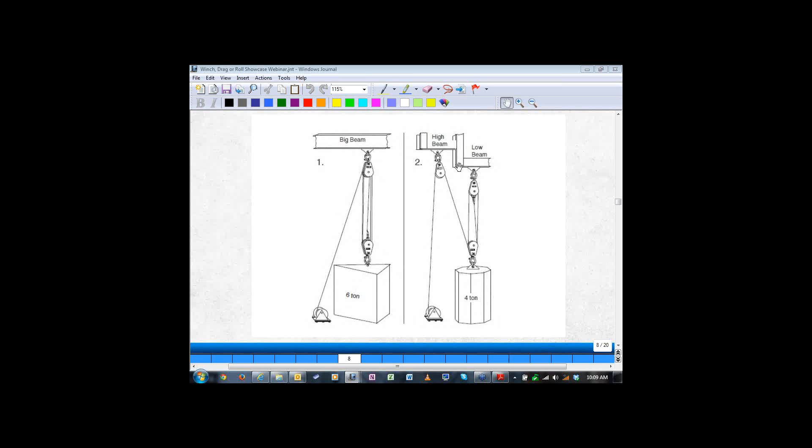Let's open up - I hope a lot of you downloaded the link that was provided by Jonah for the workshops we had. We had about a 6 or 7 page PDF document that came out to everybody when you registered, and you got notification of it yesterday. You also had some rigging cards - I'll put those up on the screen. We're going to be working from a multi-panel rigging card, I'll pop that up. We also have a journeyman card, and a master rigger card that we provided with the link.

So the PDF link document that we put up, this is the first one - it's really about winches, keynoted as Winch, Drag or Roll, and some of the workshops we'll go through today deal with those subjects. In this first example, we're just going to look at the one on the left for a minute, on page 3 of your document. We'll focus on this one for right now, then move over to the other one.

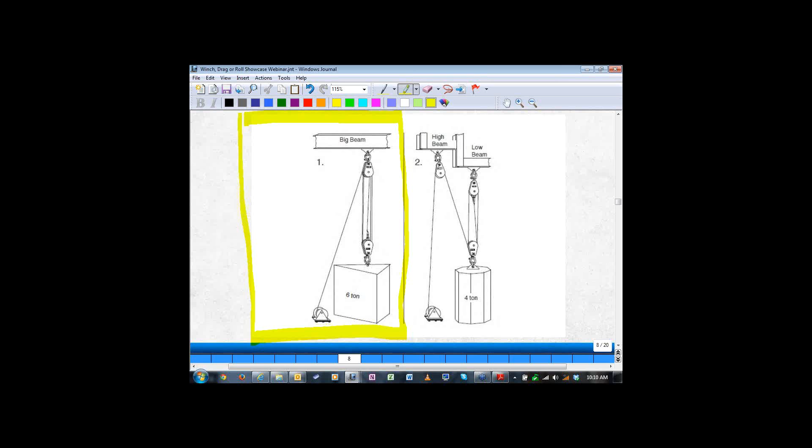We'll do a couple on static loads, frictionless system - meaning the world is perfect and nothing is hurting us from a friction standpoint. We may toss in some values. I'd like to go over a couple things with you as friction builds in the system - we may do that on the first one here, then keep rolling in a static mode. Here's the idea: the load in this case is 6 tons, and we've got a 5-part line. For those new to multi-part systems, an easy way to do that is, I'll blow this up just a little bit for a couple of minutes, and we'll go back.

So all we do is put a knife blade going across all the lines that enter or exit the load. And however many lines enter or exit as applied to that load or anchor point, that's the multi-part lifting or pulling the load. In this case, we have 5 parts of line against the 6 tons of load.

So the first question is, what's the load to the winch line? Let me back this out a bit. We have 5 parts reeved up, and we've got the dead end right here on top of that block. If you chase those lines up, drawing it flat for a second, it's up 1, 2, 3, 4, 5, down to our lead line. If you look in multi-part line books, you'll see lead line factor, lead line stress, lead line tension.

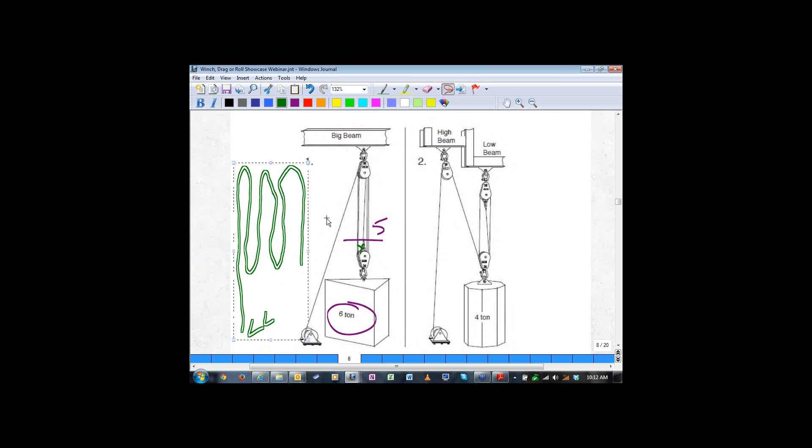So we've got a number of parts of line. Let's resolve the load to the winch line based on a mechanical advantage of 5. I'm going to give you a second, and we'll go ahead and do that calculation.

On the next page, I've got the fill-in-the-blank section. I'm working on about 2 PowerPoint frames per project, so one page will be the illustration and the other is the fill-in-the-blank for your questions. So let's go back to the illustration. I'm going to depend on you all to help keep our answers going on that fill-in-the-blank page.

Let's resolve the question. I've got 6 tons divided by 5 parts of line, and we get 1.2 ton to the winch line. Let me make a little notation over here: 1.2 tons on this line, that one, this one going across, that one, and that one. So all those, 1.2 times 5, gets us back up to our 6 tons.

So for static load, we have 1.2 ton showing up at the winch. That'll be item 1A. Item 1B is our 1.2 ton. And then the question gets down to, well, what is the load at the main or big beam right up here at the top? What's going to be imposed, and can we rig heavy enough to accommodate that?

I'm going to ask you some surprise questions, and we'll get this cleared off on my screen here. Okay, thank you very much. So we're looking at the load, the downforce on the entire system, that's going to impose on that big beam up ahead. So that's the idea.

So we want to evaluate, well, what's it got? It's sort of acting like a crane. This might be something very similar — if I was able to draw in a crane boom right here, going up and encompassing that block on a mobile crane, with boom cylinder and outriggers and so on. So it's sort of acting like a crane, and what would be on the head of that crane for load?

So let's resolve that, because we set this whole winch system up and need to decide what we've got for downforce there. We know we've got 6 tons, right? We know we've got 1.2 ton at least over here on that winch line. So we need to add those together, and our answer should be 7.2 tons right up here at the big beam.

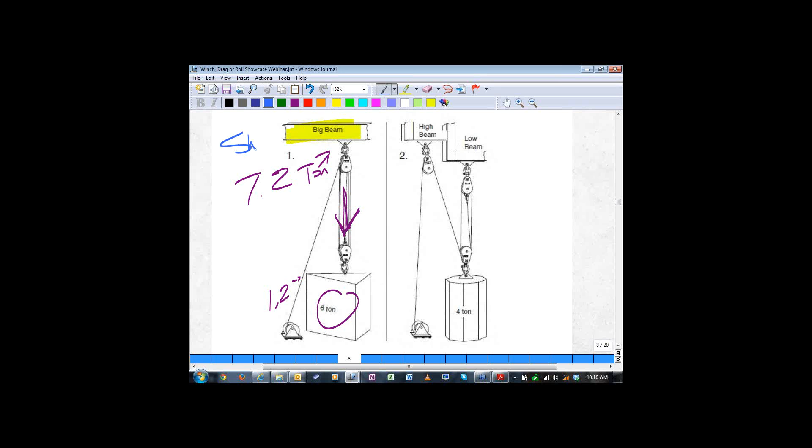Now I'll get into some other information real quick on dynamic load, but just for grins, let me ask you an off-the-wall question here. What size shackle do we need to put right in there to support that block? There's one up and one down, bow to bow right there. So what size shackles should those be?

Let's open up that Journeyman Rigging card. It says Journeyman Riggers reference card at the top — that's panel 1. Well, let's go down to panel 5. On panel 5, we've got a whole host of rigging hardware options there.

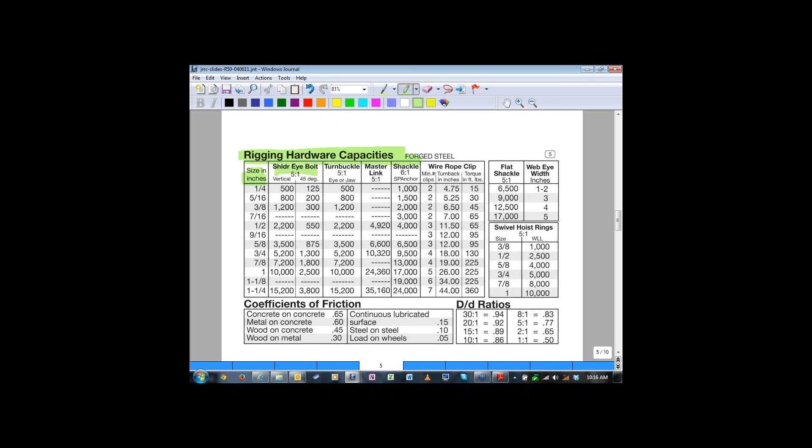You'll notice in the size column far left, we've got eye bolts, turnbuckles, master links, shackles, and so on. Let's look down the shackle column. What we had up there was 7.2 tons load, times 2,000, gives us 14,400 pounds. So let's find the first shackle that gives us that 14,000, and we're right there at 1 inch. So we're going to need at least a couple of 1-inch shackles, one up and one down, to connect that upper block to the big beam at the top.

I think that probably will sustain us even for dynamic activity. So we got the shackles up there. If we were in a bigger workshop, we'd be working our way through and identifying all the rigging components, all the block sizes and so on, and taking care of that.

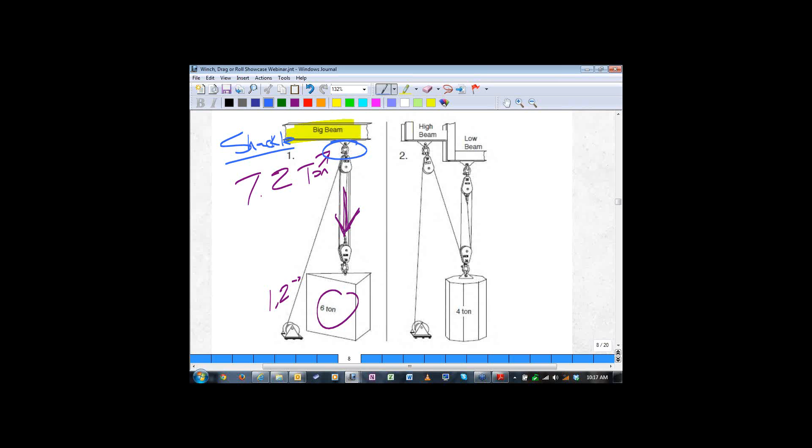Now, we've got 1.2 ton at the winch, 7.2 ton up there at the top end. For those, we're just going to do this one time. For those interested in understanding or computing the dynamic activity going on here, I'll just do a little off the side review.

I'm going to put the load on the first part of line. If you got nothing else to go on, here's the deal: you don't have a lead line stress table, which can help do some of these computations faster. There is one in the wire rope user's manual, one in the Boilermaker's handbook, one in the IPT red handbook. There's a lot of resources out there for lead line stress. Johnson Blocks has one, Crosby has one, and so on.

So what we're really trying to figure out is lead line stress. Tension to the lead line can increase as the friction increases at every sheave, and every time a rope goes around the sheave and tries to turn that sheave, it's going to get some additional resistance.

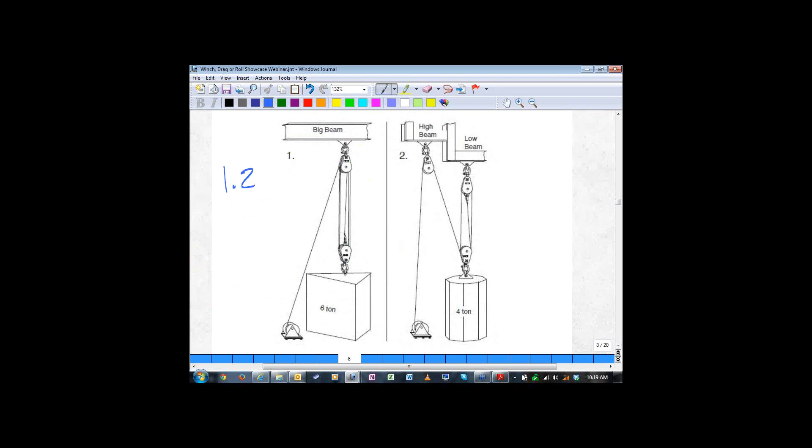In the simplest, most conservative approach, I'll start with our initial 1.2 ton, which is our dead end. That's our single line coming up here at the dead end. It goes over that first sheave, and as it turns that first sheave, there's no additional friction on that single part, so that's basically times 1.

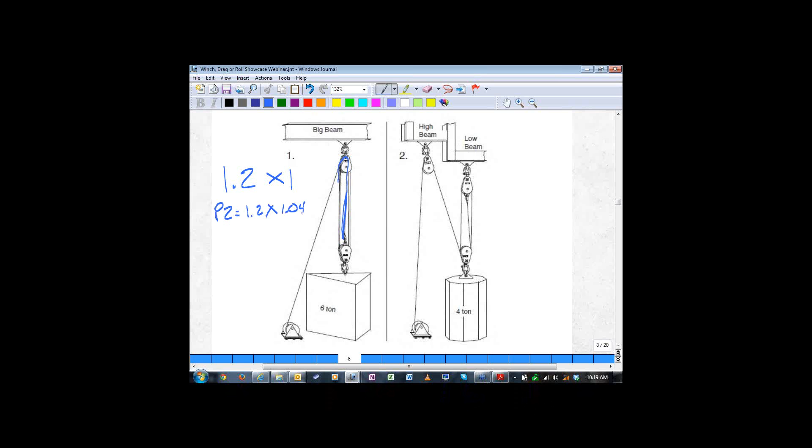But on the next one, part 2, we're going to say 1.2 times 1.04, using a 4% friction for each sheave as I turn. So 1.2 times 1.04 gives us 1.248. That is our second part of line, new tension.

And it's really compound interest. For each part of line, we're going to account for that extra 4% of friction, and add every single new part of the line all the way to the winch. So we'll take that 1.248 times 1.04 for the third part of the line, and we get 1.298. That's P3.

P4 is 1.350, part 4. I'm going to write all over the page here. 1.404 is part 5. And down to the winch line, I'll do that one more time: 1.460 is WL, or winch line.

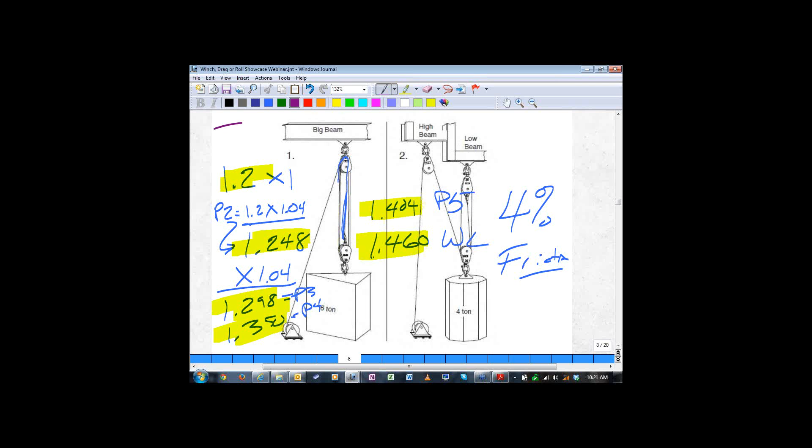So if I add those values up, while the thing's turning and hoisting, I'm going to identify that that's really my load to the big beam. So really, instead of 7.2, we might be at 8.5 ton. I've got a total load up there right now of 7.96 ton instead of 7.2 ton dynamic.

So we're still good for 8.5 ton, or 1 inch shackle, but just realize dynamically we're going to be creeping up in the overall anchorage loading, and certainly in the overall winch loading that happens down here at the tugger or at the winch. So that's the only time we're going to do that.

There's dynamic and static. Static's non-moving, dynamic is moving, and as we continue to impose and hoist, we're going to see that dynamic number go up. So we're at 7.96 ton dynamic and 7.2 static.

So there we go. All right, so the rest of the workshops we're going to deal with will just be static. Let's go over here to number 2 on the right side. We've got a 4-ton load, and we're actually supporting it by 2 different support points up above. One is a low beam, one's a high beam, named for obvious reasons.

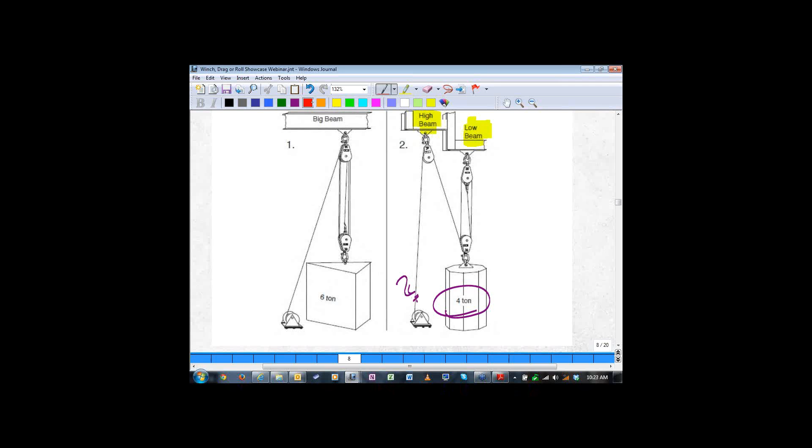And we want to see what we're going to get in a variety of locations. The first one on your page, on page 3, is what is the loading at the winch? Let's use that same process again. Work through it, see how many arms are lifting that 4-ton load, and if we put that knife right across there and bisect all those hoisting lines, we're going to find that we have a mechanical advantage of 4 in this case. So each part of line in static condition has got 1 ton.

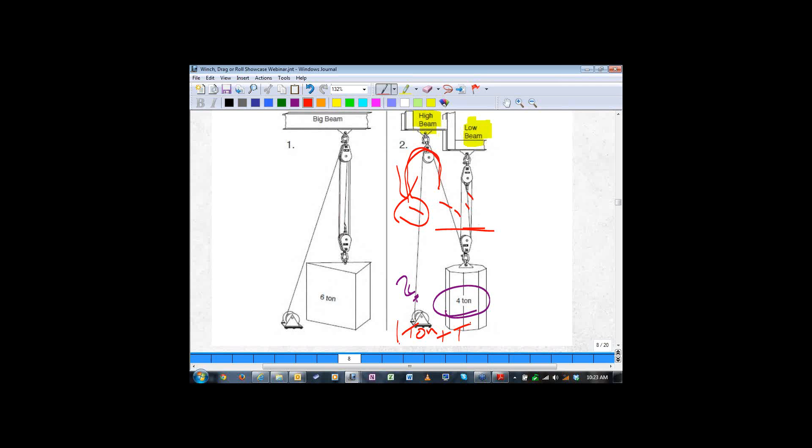So sometimes if I'm doing a quick estimation, I'm just going to do a 1, 1, 1, 1, and then guess what, 1 right there. Because this 1 on this winch line has got to pull the brother right behind it. So yes, it's going to be more because of dynamics, but we're getting the whole general gist here. So we have 1 ton plus friction, I'll just put a plus F down there for the winch line.

I'll get rid of some of these other things here, kind of get them out of our way. So the next question is, what is the loading at the high beam? What is the loading right up here? If you just mark your page with those values per part of line, it's the easiest way to arrive at the approximate value up at that high beam. I had 1 ton on this line and 1 ton on that line, so really I've got 2 tons on the high beam.

What is the load value for the low beam? If we just follow those lines up, there's that one, this one, and this one. So I got 3 of those. So I've got 3 tons up on that low beam.

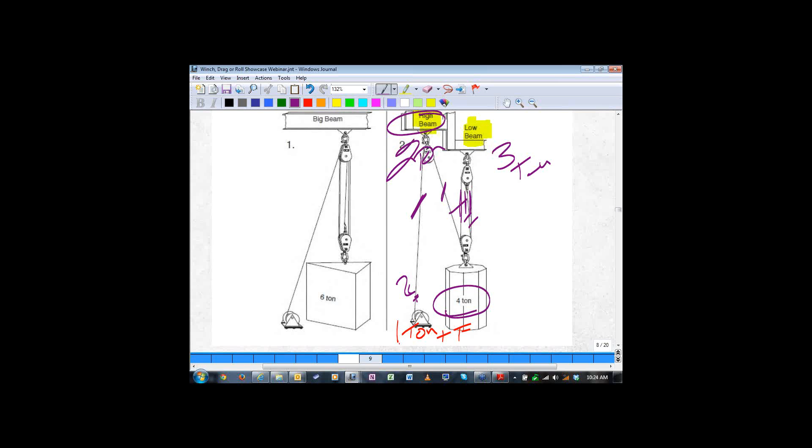So if I go to my answer page, and I'll put this up on the screen, most of you have this, have your fill in the blank items here. Let's just update this. So we've got, this one was B, this one was A, 7.2, this one is C Charlie, this one on the high beam was 2 tons, and this one on the low beam, C Charlie, is 3 tons. Excellent. Great job, Will.

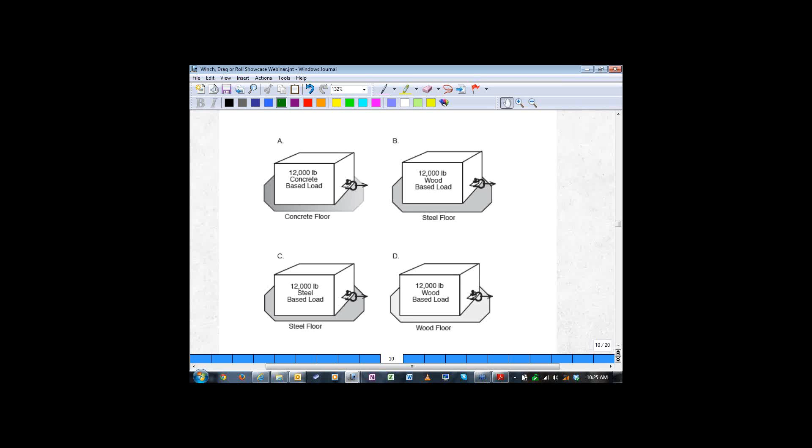We're just going to kind of keep rolling here. We've got another workshop, this is sort of interactive. If you're working ahead or we're kind of working together, that's all good, whatever works for you works for me. So on this next one, on page 4, we have 4 different examples of load moving, skidding, and in that regard, we're just pulling this puppy sideways. This is part of the winch, drag or roll approach for dragging, and it does happen, we just got to skid it, slide it, move it. But we've got different values that are going to throw us high and low for the amount of force required to move those loads across those surfaces.

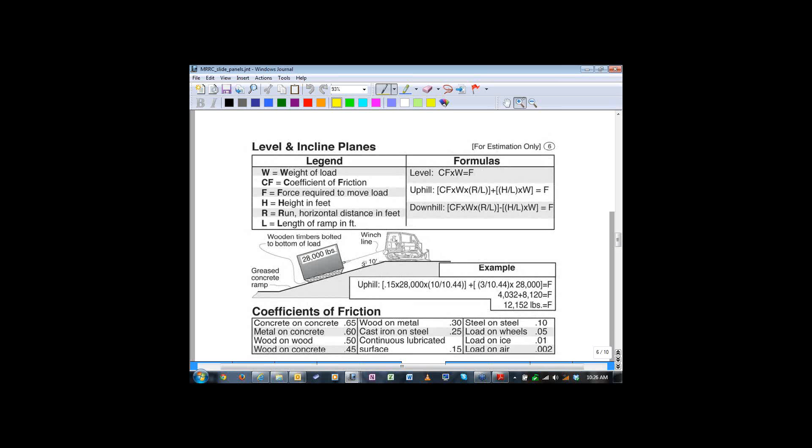So what I'm going to ask you to do is take a look. I think probably the most advanced card you can get in front of you right now is listed or tabled as the MRRC, that's the Master Riggers Reference Card. I'd like for you to go to panel 6, the 6th page or 6th panel. Let's take a look at this. At the bottom end down there, you'll notice this is kind of a, and we'll be using this formula later on, but this has got a series of coefficients of friction that are listed down below on the bottom part of that panel.

Notice we've got a variety of materials there. Now, when we put these on the card, I want you to know, and for the engineers online with us here, these values really, let's just take one for example of wood, and you'll see that it's got a value of 50%. So in strength materials engineering books, a number of tests have been done, and what we'll see in some of those books is wood on wood, and we have a range, and the range may be from 70% to 30%, depending on whether it's sanded or not. Rough, sanded, rough.

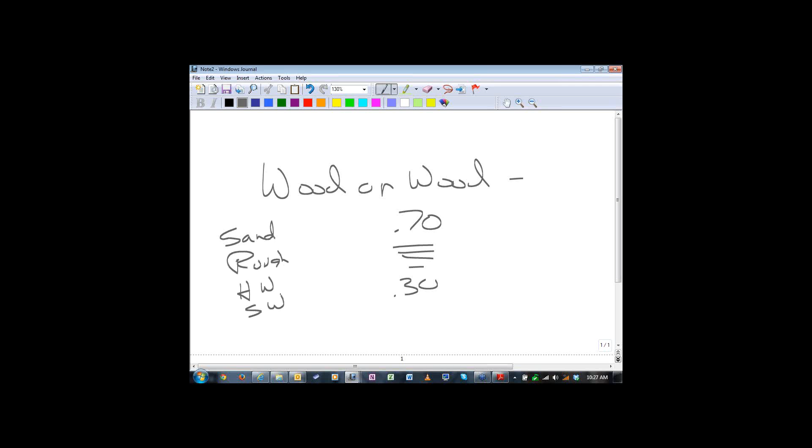We may have hardwood, softwood, wet - all kinds of conditions that can enter into that. But the average breakaway for the two materials, on a flat wood surface with a wood block sitting on it, will occur at somewhere between a 30% and 70% grade. That really equates to the value we use for the coefficient of friction.

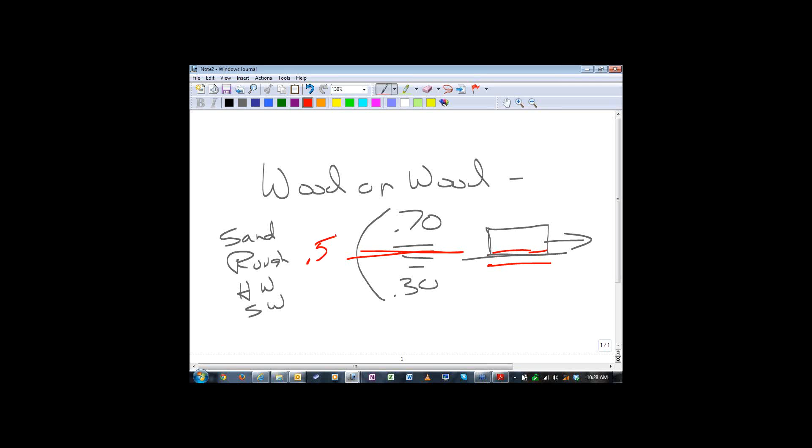At what point will this wooden block surface break away from the subsurface? So what we've done is taken the average of the values found in those books and done some testing ourselves. We've taken the average number of 50%, and that's what you end up with on your card.

So I'm going to pull the card back up and note that average number you see on the card is 50%, the mid-range number that comes from a variety of testing. Some will be higher, some lower, but that gives us a starting point.

We can all see that concrete on concrete is pretty high. It's here at 65%, and it can vary maybe from 80% down to 50% or 55%. So the value we have is the average of those numbers.

Just as a byline here, we don't put it on the card, but I can tell you aluminum to aluminum is somewhere in the 1.50 range. It's extremely high - you have two aluminum surfaces, an aluminum deck in the bed of a truck, and an aluminum gearbox in the bed. It takes more to slide it than it actually weighs, by 50%. The atomic bonding between the two materials is huge and creates very high friction.

So it's just, we didn't put it on the card. You don't see a lot of that happening, and if you slide it far enough, quick enough, you're going to melt it and weld it together. So there wasn't much future in labeling and listing that on the card, but it gives you an idea that, gee, that's a huge value, and the atomic bonding is really alert and working right there.

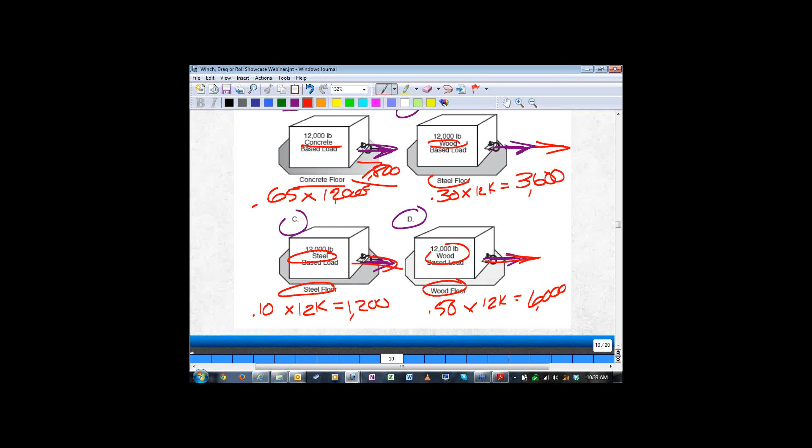Now let's take a look. Let's go forward, we're going to combine those two workshops into another workshop. Let's transfer our numbers over to our page here. I want to make sure we're dotting the I's and crossing the T's. So I've got 7,800 there, 3,600 there, 1,200 here, and 6,000 there. That's on our answering system for all those following along.

Now we've got the next page, page 5 in the handout in front of you. We've got kind of a complicated system going on here, but this isn't unusual. I've been in a Ford plant and a couple other locations where they've got a winch set up in one location, dedicated to that location, and from there they take off with a variety of blocks. We've got them rigged around columns right now, but they've got floor blocks, ceiling blocks. They can reroute that winch line within 2 or 3 adjoining rooms to do conveyor system transfer, plate transfers out, machinery and equipment change out. So they'll use one winch in a central location and work it in 3 or 4 rooms by rerouting it with different diversion blocks.

So in all those points, if we free rig it, meaning we walk in and say okay, I want to put a block over here and there, we're going to need to check with the building engineer to make sure that column, that beam, wherever we're going to anchor to, has sustainability. It's got to be robust enough to take the loading we're going to see when we start moving that object.

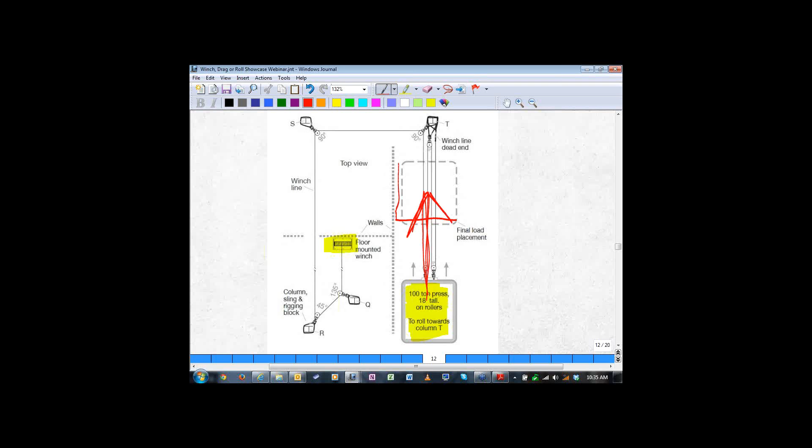Now in this case we're looking down on this load. It's a 100-ton press, so that guy's right down here. And what we're doing is moving this press forward. I'll make some initial drawings here. So we're moving this press forward on rollers to that little X box, X square. And so that's the idea. We know that the load itself weighs 100 tons.

So let's go back to our rigging card. That master rigger card would be very helpful. Notice you've got a load on wheels, so we'll take a look at that load on wheels right over here on the right side. I'll kind of highlight that, get rid of a bunch of this other stuff. And I do have something to share with you that's kind of an aside. So we've got a load on wheels here.

It's about 5%. We can set up a series of rollers that can help move that a little lighter. I'll toss this up on the screen here for you, just take 5 with me. We certainly do a ton of jacking and rolling instruction. I just pulled some documents up here quickly, I've got 3 little pictures.

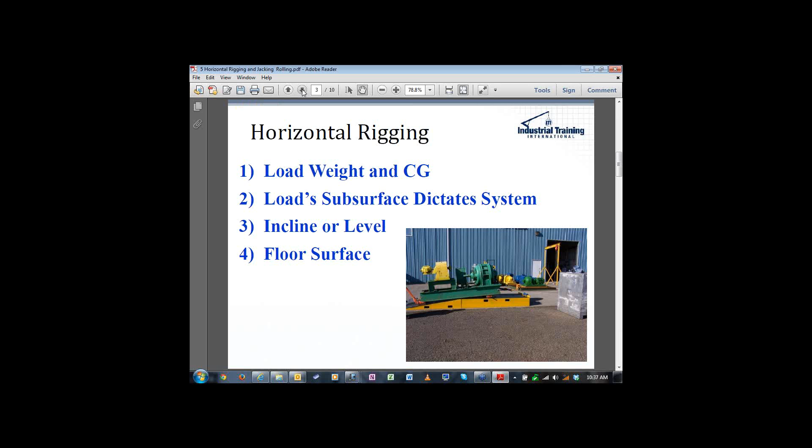I'm not going to draw all over this, but notice we've got a load going up an incline here. Load weight, center of gravity, what subsurface dictates the system we're going to use. Is it incline or level? What's the floor surface look like - wheels, pipes, skid, air casters. We got a new hydro slide system up in Edmonton, a 400-ton unit we're using for master rigger courses.

Notice down here on the page we've got pipes that we actually roll loads with. We get back to caveman rigging just to help teach and ingratiate the principles to the participants. So we use wood rollers, steel pipe, Hillman rollers, steel Hillman rollers, multi-ton, steerman, synthetic wheels, air casters, and so on. So we want to always take these things slow, and we always got to watch out for where our center of gravity is for stability.

Make sure that our support points are ahead and behind, and side to side, and we're supporting the load properly there. When we're jacking loads, one end or one side at a time, we'd never jack a load on 4 mechanical jacks on 4 corners at the same time. Really dangerous practice. We can helicopter that thing down pretty fast and crush a foot or hurt somebody pretty bad.

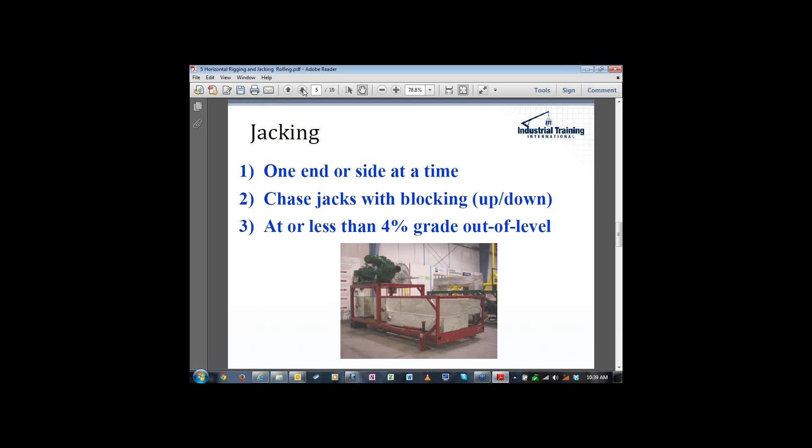We chase blocking up and down and don't get more than 4% grade out of level. So we don't want to side load the jack by getting too aggressive and trying to raise one end too high or lower it too much. We want to chase that up and down with blocking. So guys using jacks here, synchronize, keep hands and feet clear, and ensure that the jack to CG location is good to prevent overload to either the roller set system we're about to place or the jacks.

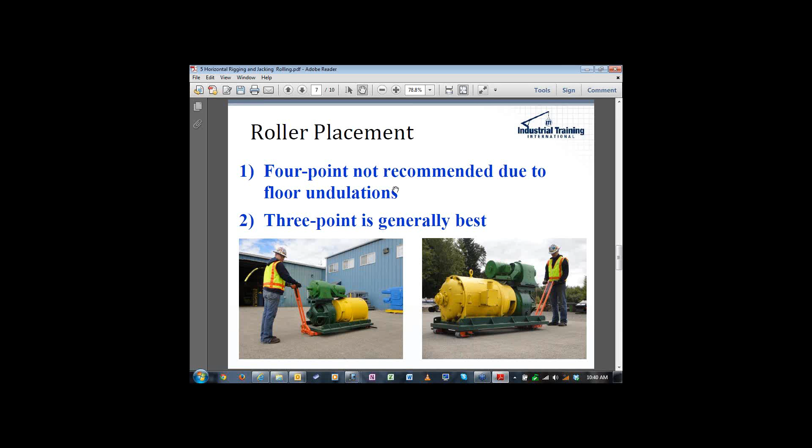So it's a really handy system. One thing you always want to make sure of, because we're going into a workshop on this, moving a load on wheels, is to make sure that center of gravity is contained and within that triangle support. So you've got a steering in, a pup to the south, a pup to the north, and on the far east side there you've got your steering unit. And if this center of gravity was further to the right, that'd be pretty dangerous. Stability could be an issue.

In that case, we'd want to flip the whole system around. So you want to have that center of gravity at midline or closer to your double pup down there. Keep it as far away from your tipping axis as possible, as reasonably achievable, and watch out for the height of the center of gravity. In the X, Y, and Z axis, we always want to make sure vertically that the center of gravity is contained and stable. So we have to push our footprint out, put outriggers underneath the load, you might say, and put some beam extensions out that create better stability.

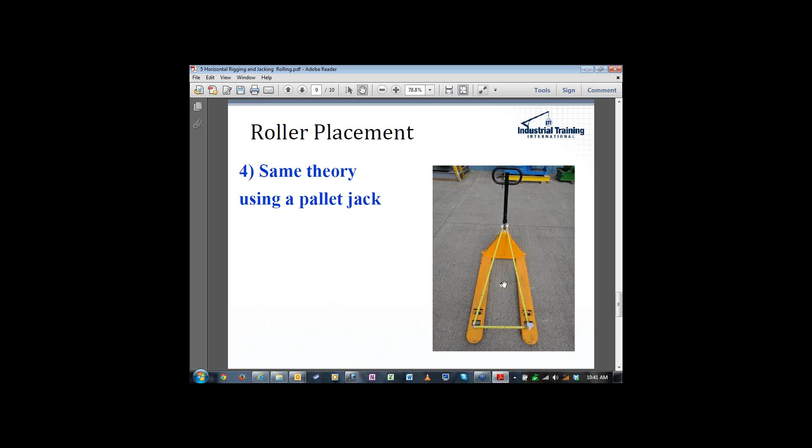This really is just working on the same principle as a pallet jack. Nothing new, but 3-point roll is a great system versus 4-point. We can go into that later on another workshop webinar. But really, you got a single down here that steers, you got a pup there and a pup here, and we're containing the center of gravity. So it really is the same thing, not new thinking. We're just reapplying it in different ways.

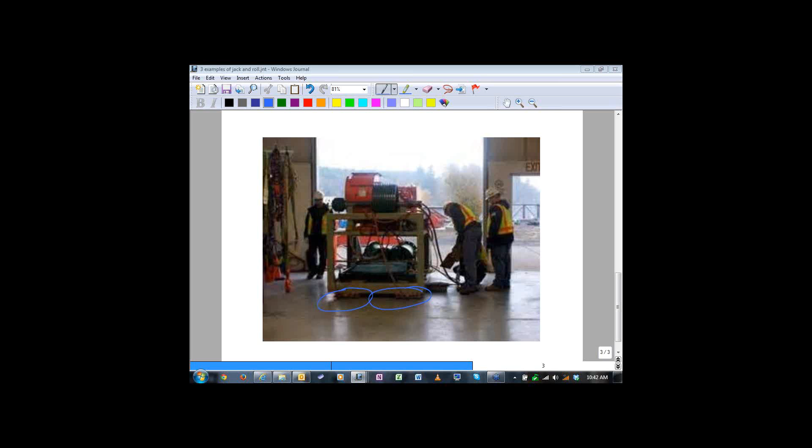I'll close this out here. So we're going to move a load on wheels, and we said about 5%. On synthetic wheels, our experience has been about 2.5%, somewhere to 3%, coefficient of friction. Nice big wheels, good roller bearings, standard wheels, nothing to hurt to go 3 to 5%. So that's what we're going to use for the workshop.

So let's go back to page 5 there in the book. The first thing we want to do is arrive at, its dead load is 100 tons. And what will be the force required to move that 100 ton on wheels? So using our previous workshop, I'll just write across the screen here. If you remember, we'll take the coefficient of friction times W equals force.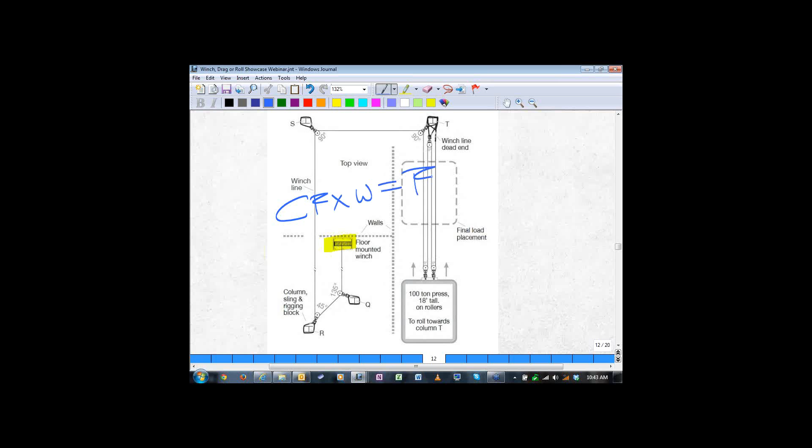So in this case, our coefficient of friction is 0.05 times the load of 100 tons. That's going to give us 5 tons to move that load to the north, if we call that north. So we got 5 tons anticipated to get that puppy moving. And that's my magic number right there.

On my answer side, where we can be recording our information, our first answer: weight's 100 tons, sitting on industrial rollers. What's the anticipated force? That force is 5 tons. That's going to be B.

Now we've got a whole variety of questions at various connection points, columns, and winch to see where we're at for anticipated load. Now let's go back to our drawing.

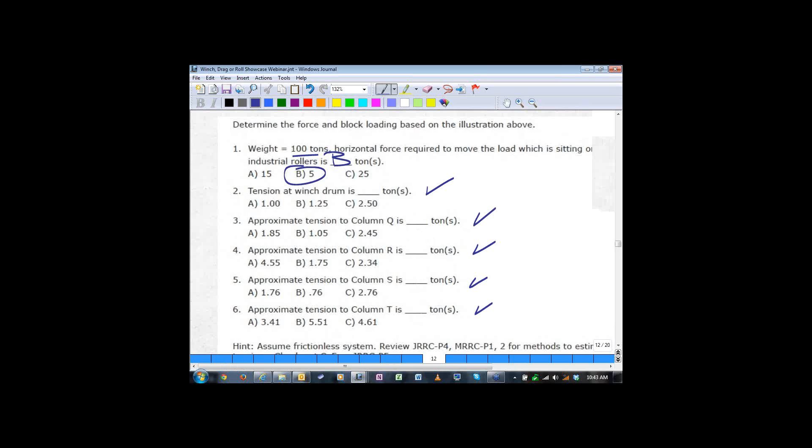I'll just put that up on the screen here. Hope everybody downloaded their link. Otherwise you're kind of working off my screen, which is a poor substitute. So I hope you got your workshop and your cards with you.

And remember, we just talked about cutting the hoist lines or winch lines that are entering or exiting the load. In this case, there are 4 of them. So we're going to take that 5 tons, divide by 4 parts of line, and find out what our line pull is going to be: 1.25 tons per part of line.

So I just do this: 1, 2, 3, 4. So each one of those has got 1.25, and I'm just going to write 1.25 tons back here at the winch.

Now, for those of you that were chasing the dynamic value, I did a little pre-work and just added 4% for every part of line after the first part. And that 1.25 - so if I put that, just put an S there, I'm going to put down a D number for dynamic, and I arrived at 1.65 tons.

We won't do any more of that, but I just wanted to let you know. So dynamic for turning all those sheaves - not breakaways, not really counted yet into that - but about 1.65 tons on the winch. A 2-ton winch minimum would certainly be advisable in this case, and higher would be better. But 1.25 ton is our working number, that's what we'll use for the balance of this presentation.

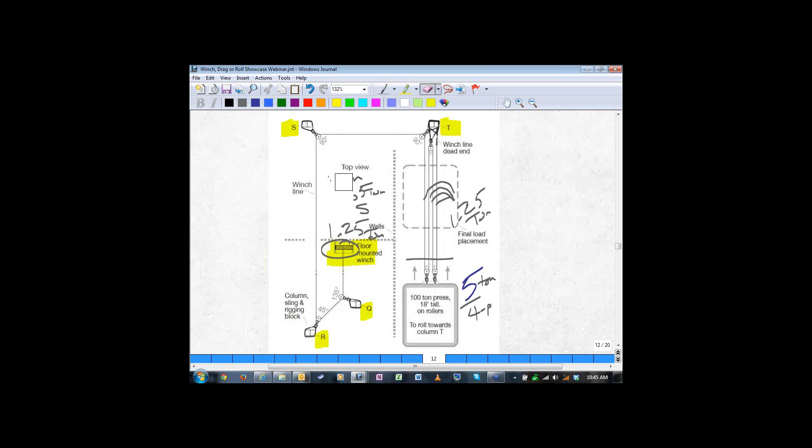So let me get rid of a couple of things here. That's good. All right, excellent.

So our first question: if we're going to use 1.25 tons, the way the questions are set up in the book, we're kind of working backwards from the winch. So that winch is 1.25 tons, and it goes backwards, Q, R, S, T, and we're going to work back to the load. Those are the things we're going to discover next.

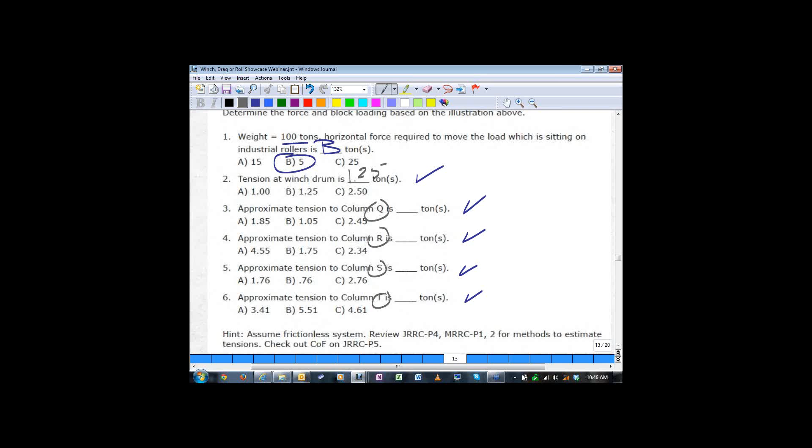Our next discovery points are going to be right back here at Q, and I've got about a 135 degree included angle right there. So what's that do for load to that column and that block and sling and shackle that are holding that block in place? So we got now.

So just kind of note in our heads, we've got 135 degrees. Now I'll take you to the first.

Let's take you to a card, the Journeyman Rigging card. It says JRRC. Let's go there, and let's go to panel 4, and you have a living example there on panel 4.

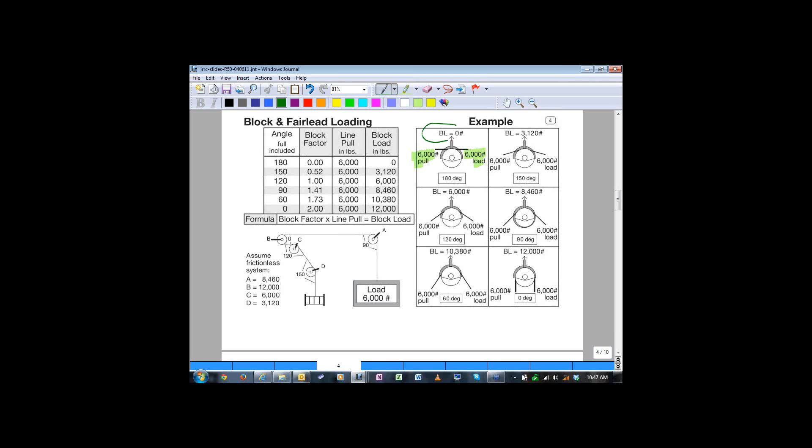And we've just stuck in here, just for educational purposes, a line pull of 6,000, a load of 6,000, and then gave a variety of block setups at 180 degrees, 150, 120, 90, 60, and 0. So we set this up as an example to the right. The example follows out over here in this column, line pull, and follows to block loading.

But of special importance here, I want you to take a look with me at the formula. The formula says that we want to take the block factor times line pull equals block loading. And block loading will dictate what we use for backup slings to restrain or hold that block in place against the column. Now, let's just work this one at 90 degrees. I know we're going to have one of these in the workshop.

So at this 90 degree setup right here, what we're told to do is take the block factor. In this case, we're going to read right across there to 90 degrees, 1.41, in this case 6,000, and it's going to result in a block load of 8460. So we'll take block factor times line pull equals block load. Okay, and that's pretty straightforward.

We're not adding dynamic winch line pulling right now. It's all static, so just to kind of get us there. Now what I want to do is take you to, now switch cards with me. I appreciate everybody being so easygoing. I don't hear you screaming or gnashing of teeth or anything, so that's good.

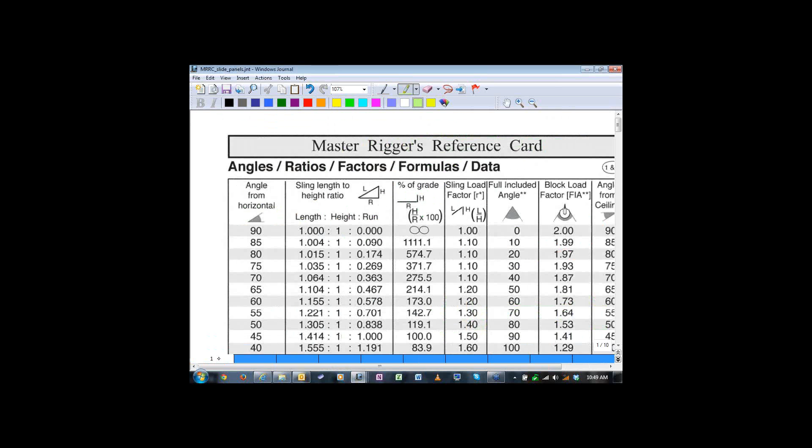So let's go to the MRRC, Master Riggers Reference Card, Panel 1. I'm right on Panel 1/2, and you'll notice you got a whole bunch of values right there in the big table, a whole bunch of columns. What I want you to do is go over here with me to the full included angle column right over here. You'll see that column goes from 0 to 180, in 10-degree increments. And the column right next to it is the block load factor column, and those two columns really work together. These are actually rigging cards that we use for all of our training programs. What we just did today was give them to you in PDF form.

These two, the value we had from that first block, and that block value, let me get this highlighted here. That block value at Q is 135 degrees. That's the angle, as in the full included angle. So we're going to search that card out, and let's see where that comes in here. So I've got a 130 option and a 140 option, and my diagram is showing me 135.

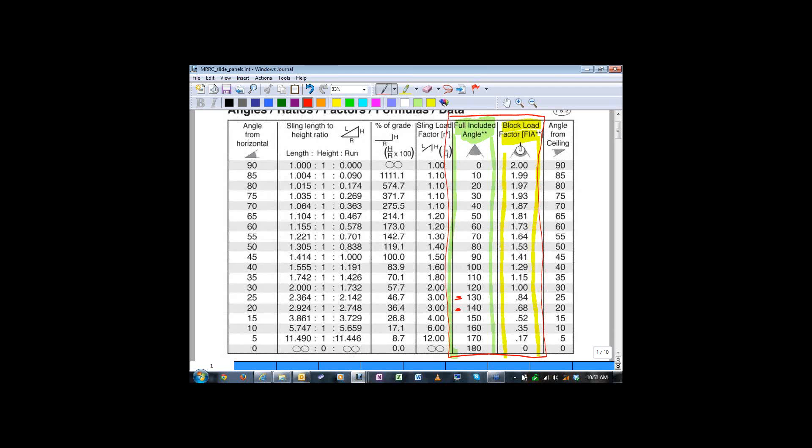So just like operating cranes, we always go to the one that would produce the lowest gross capacity or lowest capacity for a crane. We would find that on a load chart. In this case, for rigging, same concept is which one would produce the highest block load. So at 130 degrees, I see a block load factor of 0.84, and for 140, I see a block factor of 0.68. So between those two, which one was going to produce the higher block load result for me, just using those two as the options? And if we picked 0.84, that would be right.

We're going to use that higher one. We know it's a little higher than it might be at 135. We're not going to interpolate into this thing, but we're going to just pick the 0.84, and we're going to use that for solving our problem. So right off to here, I'm going to get rid of some of this scratch up now. We know our value is 1.25. Let me get rid of that. I appreciate everybody's patience, I'm just an old man having fun here.

So, all right, got a 0.84 times line pull. So that's block factor times line pull, LP. And so we're going to put in the value for line pull right there is 1.25, and that's going to give us what? It's going to lower it, isn't it? Right. So it's going to be 1.05 tons.

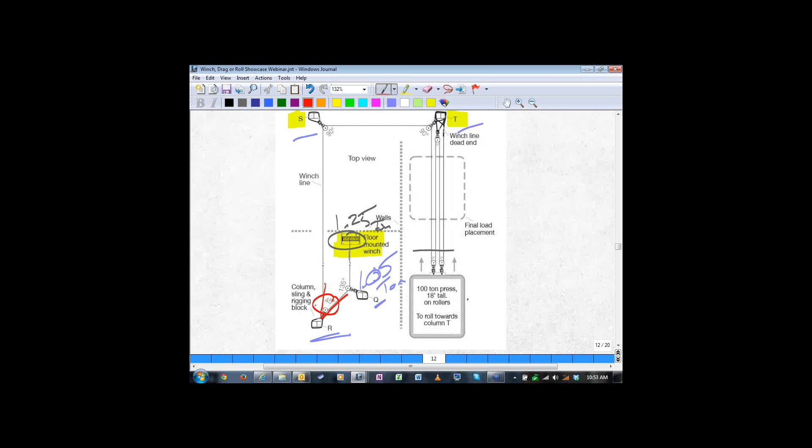So I'm going to kind of quietly work my way over to the card again. I'm going to see what's my next angle. 45 degrees. That line comes in and out at 45 degree full included angle right there. I'm going to kind of quietly go over to my card, take a look at my card and see, well, what do I have in the 45 degree department?

Let's see what we got there. So we're at 45. I've got 40 there and 50 there. So I can see I've got 1.87 and 1.81. So I'm going to use what, the lower one or the higher one?

Excellent choice, we're going to use the higher one. So we're going to use 1.87, that's block factor times line pull of 1.25, and that value we're going to put down here as should be 2.34 tons at R. Okay, 2.34 tons at R.

This one you'll know in your sleep because it works in a whole lot of rigging stuff we do for everything else. So let's go up to S, we'll go find our block factor at 90 degrees.

So we'll go down here, 90 degrees. Our block factor is 1.4, 1.41, we'll use that, solve this little puppy out here. So my block factor is 1.41 times line pull of 1.25, and my block load is going to be 1.76 tons.

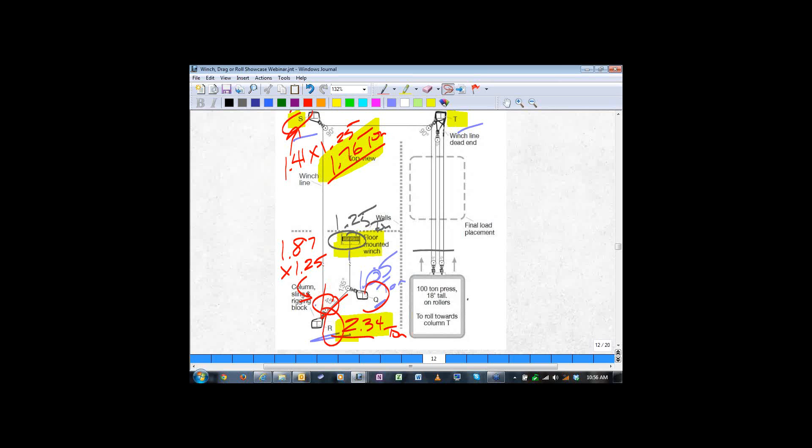So now we've got Q, R, and S, we've got those. Now we're going to work on T. So I'm going to kind of wipe all this other stuff out and take that page up. Let me kind of bounce this page up a little bit, get this into view. Sorry about that.

All right, so we're going to work on T right here. Kind of a simple way to look at this, and I say simple because that's the only way I work, is I start out like this. I know I've got 3 straightaway pulling lines, 1, 2, and 3 from right to left there, that are going to show up at 1.25 each.

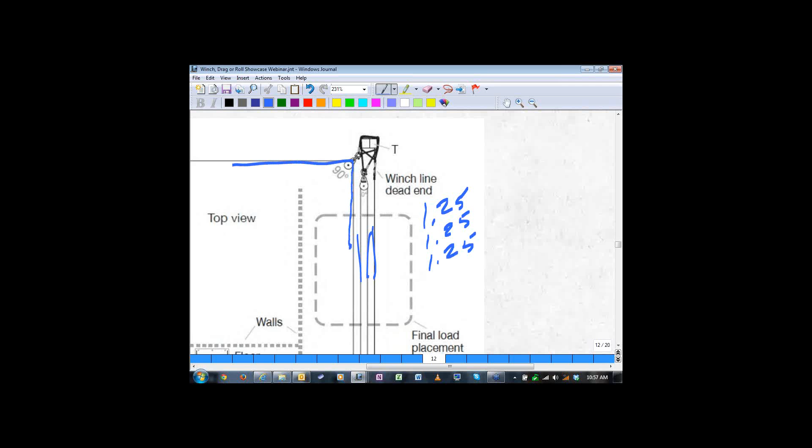Now this 4th line, this guy is going to go up, go into that block, and go to our left. And he's working at a 90-degree block, so that's going to result in something unique, kind of pulling this way on that column, because the others are pulling due south if we put it in that direction. But that's still a load, it's still a force being pulled against that column base. All that rigging's going around there, just got to make sure we account for it, and can we take it to the building engineer and get his approval.

So if we remember, we're going to use that block factor times line pull equals block load, that's our formula. So in this case, what was the block factor for 90? That was 1.41 times line pull of 1.25, and that gave us a block load of 1.76. So I'm going to take this little puppy and go right over here with it and add them to these 3. And at the end of the day, those combined are going to make 5.51 ton of force pulling against that column.

Now what we all appreciate is that it's not all in the same direction, but we have just slightly over 5.5 tons, and we can sit down and arrive at the exact final vector for that column, and it may be down in, let's just going to draw a line here, it may be down in that range. That's the final vector, potentially for this guy.

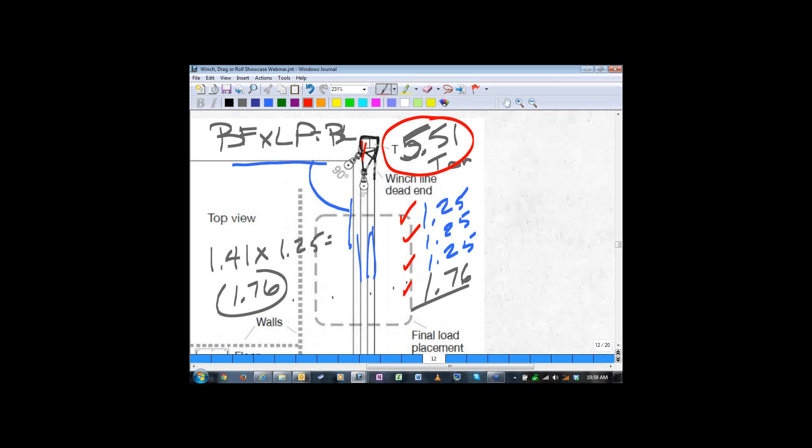So we want to take this number. Can we rig up everything accordingly? Can we get the right block sizes and shackles? Can we get the right dead-end connections for slings? Can we rig the slings up to it, protect the slings and so on, and account for the block or the final load to that column and get the write-off or sign-off from the engineer that we've got that accounted for? So that's the whole idea, we're piling a bunch of, but it shouldn't be a big shock when we step back to the big picture here for a second.

Let's put this into view here. Shouldn't be a big shock. We've got a whole bunch of, our initial project was to pull this puppy forward and move that forward, and we know it's already 5 tons of rolling weight, or rolling force to move that.

5 tons to move it. So the fact that we ended up at 5.5 ton load at that column, I'd say we got off pretty lucky, actually. You know, about the worst thing we could do for this would be kind of the bad idea of the day.

Would be to somehow arrange our winch system to cut a big honking hole right through the walls here and take this and try to do this with it.

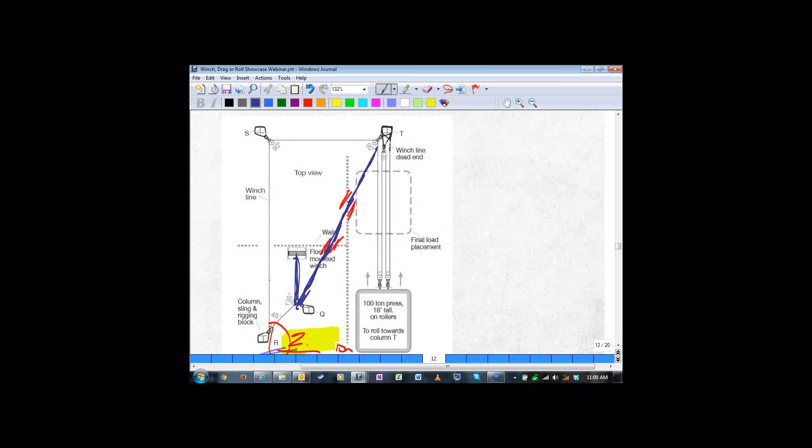Now watch what we're going to do. We're going to come off of this block right here, and I know the block isn't sitting in the perfect position. We're going to run right through those walls and put a BA block. That's a BA block, and in Missouri where I grew up, that's called a big-ass block, just so you know. We're going to put a BA block right there, and we're going to come down and put a big connection right there to the load.

Now, my goodness sakes, what do we got here? So if we took, we might call that angle right in there, let's call that 20 degrees. And I know what I got, 5 tons there.

Let's go to our rigging card, the master rigger card, and see what 20 degrees is for a block factor force. Oh my goodness, look at that. So 20 degree included, my block factor right there is 1.97.

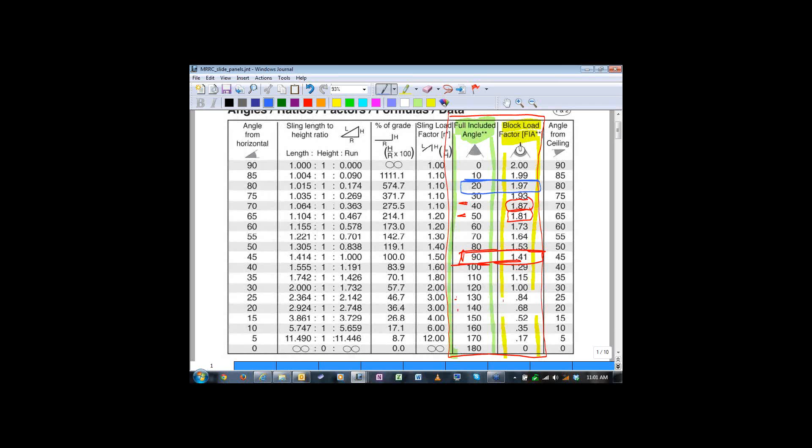Isn't that, man, I don't know how much, I got to get my calculator out for this. So let's take a look then, 1.97. Wow. So I'm going to take 1.97 times our 5 tons. Get that going in here, 1.97 and 5. Oh my goodness, we got 9.85 ton on that column right there.

So that's part of the beauty of mechanical advantage. Adding parts to lines reduces the amount of force, and every block you want to put into that system, either mechanical or diverting blocks, it can always kind of help reduce those anchorage points, because if we want to just go straight into that column and right back to the load and just try to give it a monster pull...

You know, we're going to actually put a massive load. This block's going to be reoriented, kind of over here, but we're going to put that same honking load right down here. So we're going to put 9.5 ton to that and 9.85 ton to that column. I mean, they're about the same angle, so my goodness, we're going to put almost 10 tons to a column.

There's no reason to do that. That's why we buy smaller blocks, get a nice small, good high-capacity tugger, and multi-part that system and reduce that line pull, reduce the respective loading to those anchorage points. Because just doing a single line pull, oh my gosh, that's huge. So anytime we can multi-part, we're saving our bacon and lowering that load to those anchorages.

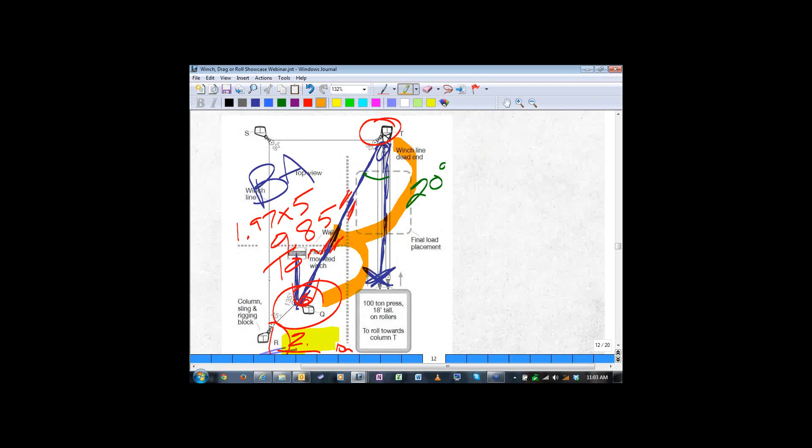Okay, so let's take a look then, and let's double check our answer section. I don't want to leave anybody hanging. Everybody's working from the answer stuff, so I'm going to replicate our answers from the other page. This one should be B, 1.05. R is C Charlie, that was 2.34. Item 5 is A, and item 6 is B. Excellent, okay, very good. So let's take a quick breath.

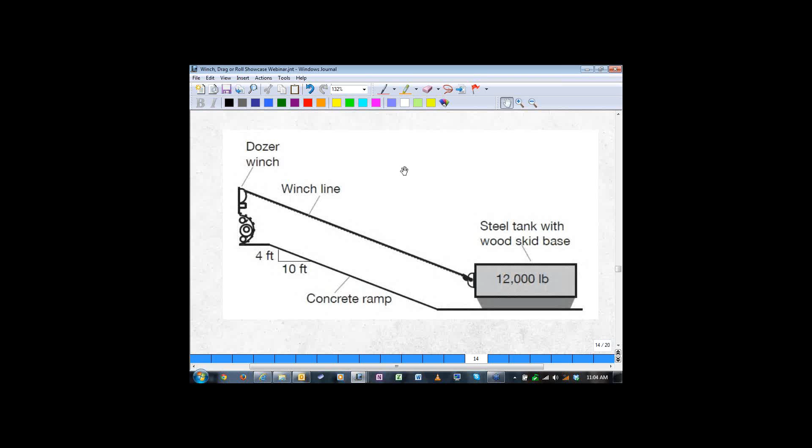Okay, we're ready. So let's take a look then at pulling a load uphill. And of course we wouldn't want to put rollers on it, that's too honking easy. So we're going to skid this guy up there. We got a BA dozer up there. And you can feel free to go ahead and mark your page there, you know what BA stands for. So we got a BA dozer up there with a winch line, and we're going to skid this guy right up the incline.

It's 12,000 pounds load, and significant information right here: it's on a wood skid base, and it's on a concrete ramp. So this concrete ramp is there and here and there, and so we're going to slide that puppy right up there. This is part of that winch, drag or roll. So right now we're in the dragging business, and we're going to see what we're going to get for resistance. What amount of force is required to get that guy to go up that ramp?

Now there's one piece of information here that we need to get started with. Let's look at our fill in the blank information down below. I'll get over to the next page there. So we know what our weight value is. What is the coefficient of friction for wood on concrete, and where can I find that?

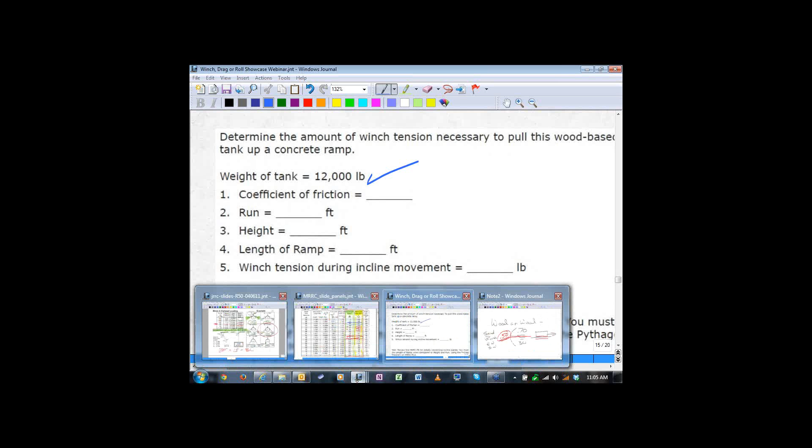Let's take a look. Let's go back to our master rigger card, panel 6. That's the master rigger card, panel 6. And our average value for that guy, you can all kind of see that down here. Our average value is showing up, wood on concrete, and that looks like 45%.

Okay, at 45%, that's our coefficient of friction, so when we do our little formula, it's going to be 45% CF times W equals force. But look what's going to happen here, we're going to get a new special formula. So stay on that panel 6 with me for a minute. We have 3 total formulas in the upper right-hand corner: one is working on level, one is going uphill, and one is moving downhill. So we're going to use this uphill formula and incorporate that into this workshop. You're going to want to get that page, panel 6, to be able to work the workshop page 8. So let's get that formula right there.

We're missing some, so let's understand what we have over here for the legend. This says in the formula: coefficient of friction times the weight times R, which is run, horizontal run, divided by length of ramp—that's our incline—plus height, vertical height, again divided by length of ramp, times W, which is weight, equals the force. So let's take that formula with us over to solve this problem.

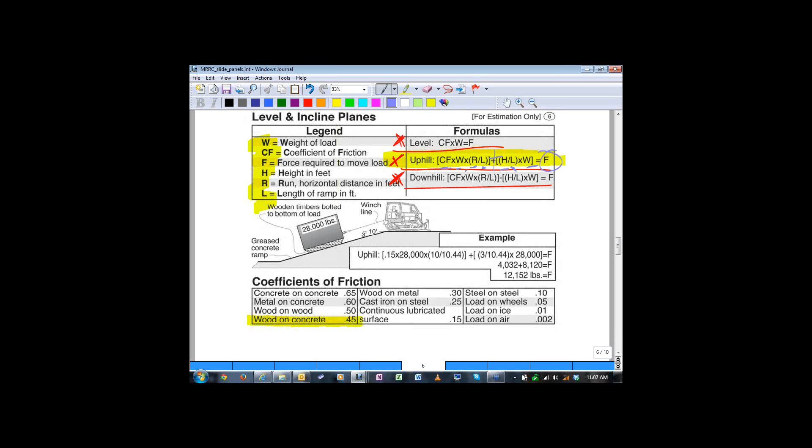And we know our CF, coefficient of friction, is 0.45. Excellent. Okay, so let's see where we're at here. We got that, so let's go to that page. Our run, based on our drawing, we have that at 10 feet. And our height, based on our drawing, is 4 feet. What we just don't have yet is length of ramp.

So I'll put the drawing up. We just identified the run is 10, height is 4. I just don't have that length of ramp based on that. What I need to do then is figure out, well, that's going to take me back to the Pythagorean theorem. So if we remember, we've got, let's just apply here, a squared plus b squared equals our unknown length of ramp, c squared.

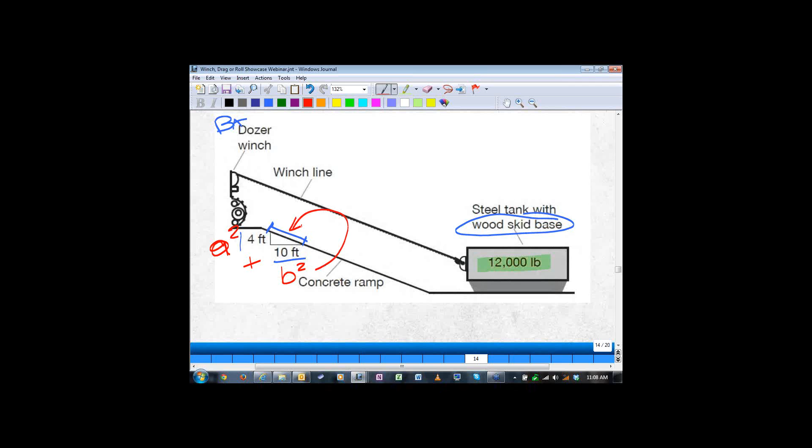Okay, all right, so let's just do that while we're here for a minute. So we've got 4 squared plus 10 squared equals our unknown c squared. And we know that's 16. 4 times 4 plus 10 times 10 is 100 equals c squared. We take 16 and 100 is 116 equals c squared. And I'd get rid of those by taking the square root of both sides.

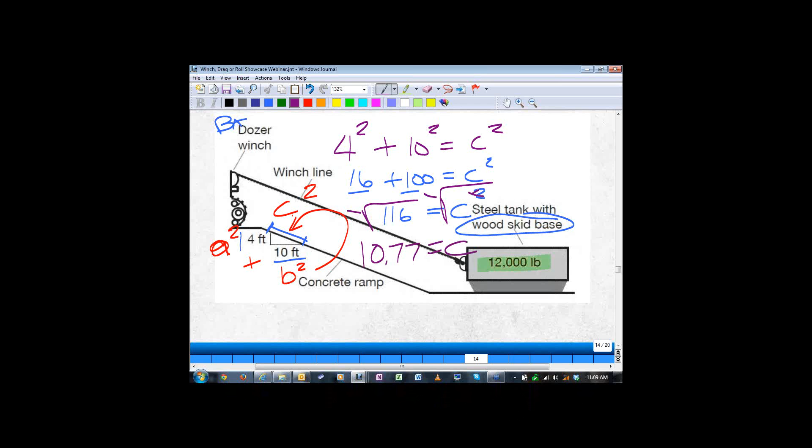So this square root on the right takes away that guy, so C equals, and let's get that down, and I got 10.77 equals C. All right, so that's 10.77 feet. So let me get rid of that stuff. We haven't had fun yet, that's the important part. So I've got 10.77 feet for that length of ramp right there.

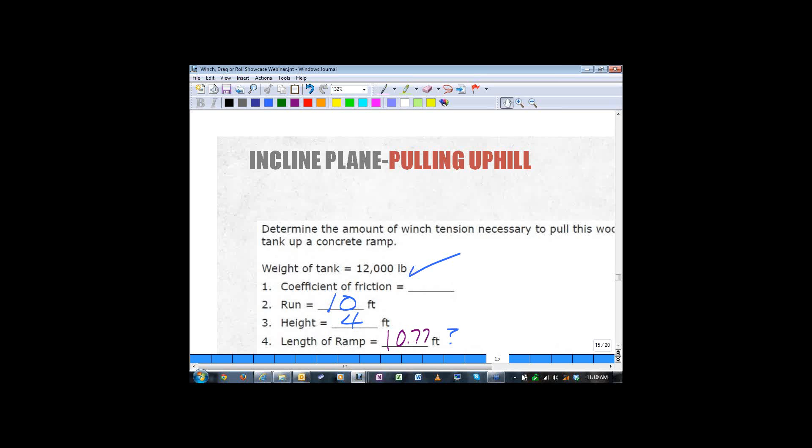Now I can put that on my next page. Now I've got that 10.77 feet. All right, so the question is, the big question on this, looking for the solution here is, what in the heck is that winch tension during the incline movement pulling that uphill? That's what we want to solve.

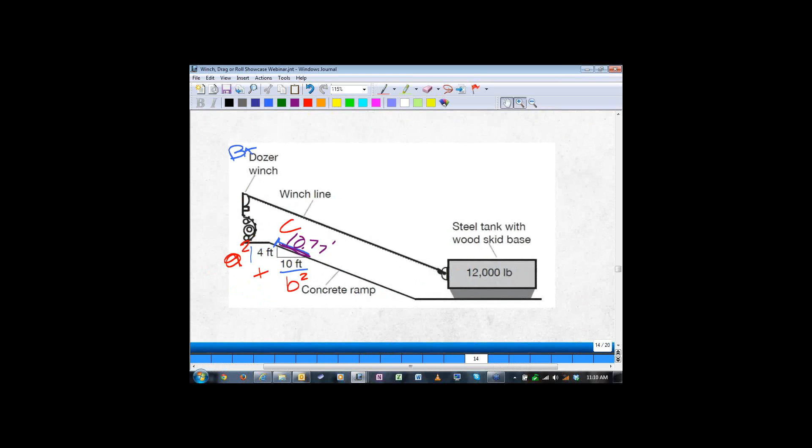So let's put that formula up on the page, and what I'm going to do is slap a new kind of page up here. Well, I can work from this, I think. I could do that, increase this a little bit. All right, let's try this. Give this a whirl. Okay, you know, I'm going to run out of space. Rethink, let's do this, all right, let's put it up there.

So we've got our formula, CF. I'm going to replicate that formula: times W times run divided by length of ramp, plus, let's see, height divided by length of ramp, times W again, equals force.

So let's put in all the little things that we know. I've got a 0.45 times 12,000, times 10 divided by 10.77, and I kind of got to work all that out on the left side, plus, let's work this out, I got 4 divided by 10.77, times 12,000, equals my force again. So just sort of work the left side and the right side, and let's get down and add them together.

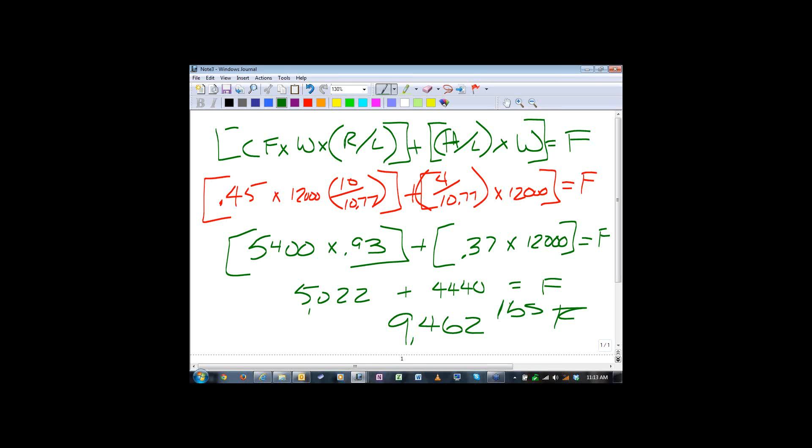9462 is what I come up with for our value for force to move that uphill. Yes, there's some breakaway, and it can kind of float up and down, dynamics and all that, moving and skidding and working, and so we're going to transfer that. Let's take that right over. So I've got about

9462 to pull that puppy up the hill. If I look at my winch on my dozer, I might be asking, do we have a 10,000 pound or 12,000 pound capacity winch? And how good's the dozer for staying up on top of that little hill up there? There may be all kinds of opportunity

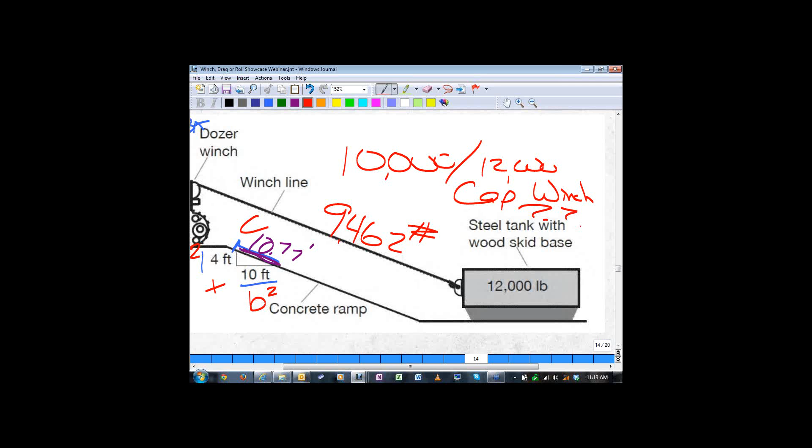To see if that's going to work as our anchorage points and so on. So he may actually - we've seen this, saw this on a grooming project for a highway embankment - where a guy would run his winch line down, come down, and then to help pull another dozer back up the hill as he's working in grooming, he'd run over and anchor off to a third dozer working on the side over here. So run a block here, so they can split the load to some degree, and it certainly gets higher as he gets higher, so they get really close together. But to help pull this guy back up and down the hill to work it that way, so put a block there and so on.

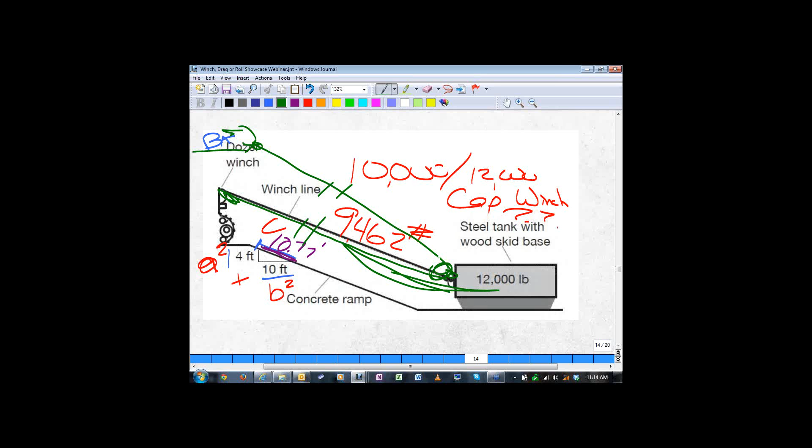So we just got a straight line pull, and we should be looking at 9462.

I'm just so excited. Most of you have been with me before on these, and you know, I just kind of wander off into these little bunny trails, and I appreciate your patience with me. I just have a ball doing these, and I really appreciate a lot of you coming back for the second, third, and fifth, and 16th time. So we're just having a blast here.

So 9462 is our anticipated tension there. So let's just take a look at one of these, let me put them up on the screen here for us. I'll back this down a little bit. What got us into this, and we'll just do this one, I think, and we'll call it good. We just don't want to run too far over time here.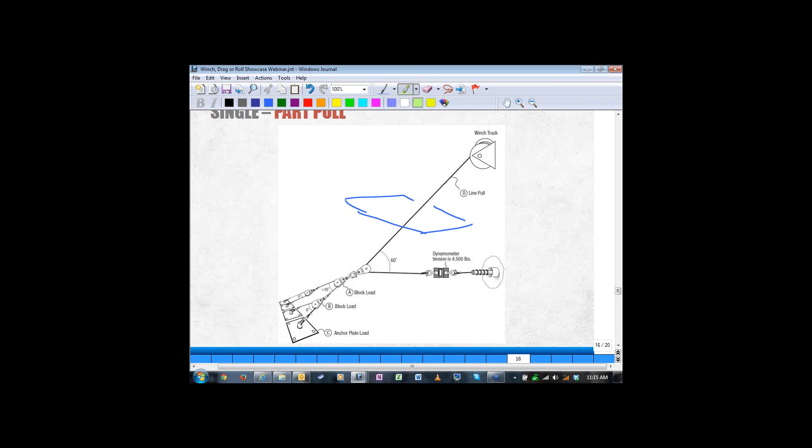But what we did was, with the client, they're working in an underground vault, and so you got to kind of envision here. They got a hatch. And this big vault - this is an underground vault, so this is all underground - and the big where these guys are working, it's an energized vault, and this wall here is all working that way, and they got conductor

that runs underground, and in this location, 85% of their power is all underground power in this particular city. So they've got a ton of underground wire running all over creation, and sometimes the wire burns up, things happen, and they get stuck, and they may have a 400, 600 foot run of it or more, and big wire, and it gets burned up and sticks in the conduit. I mean, just ugly things can happen.

So they've got to pull this wire out and replace it. Breaking it free is most generally the biggest challenge, and we're working with them using dynamometers, big winches, just trying to anticipate, know what your load is, what the load is, and understand what the anticipated resistance is going to be, and then try to rig up for it. So it's a lot of work, and it's really dangerous. I've been down in vaults with these guys working and pulling energized stuff around in some cases, and oh my goodness, it can get just a little dicey. You just don't want to fall over and grab anything and get all lit up.

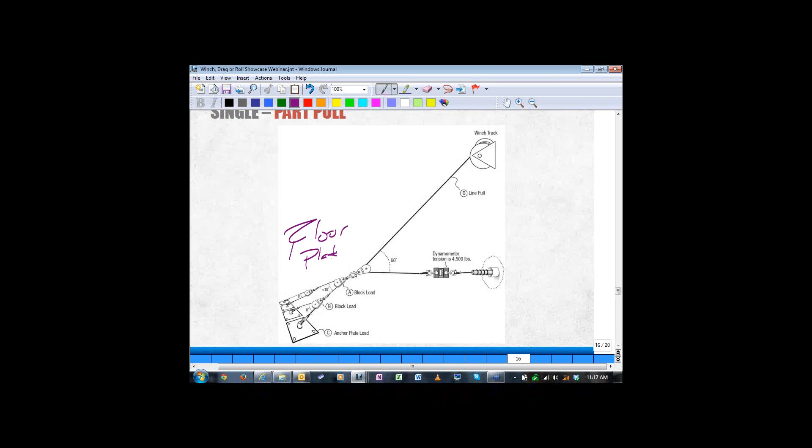So we worked with them. We designed some floor plates, and their engineers stamped off on it, but these are 5,000-pound capacity floor plates, and what they are is they're plate like this - I think they're 5/8 plates.

They've got a solid round stock that's welded right here, and a hole that's drilled and tapped for a swivel hoist ring of the appropriate size for 5,000 pounds. So that's what you're seeing here is the bale. It's all torqued, and these are four-bolt anchors setting this thing in place.

Inside a concrete vault you've got really no rigging points, so you have to build your own anchorage points. We worked with them on designing high-strength short slings that can go up, used with roller blocks that adjust back and forth as the angle changes. You've got to have the latitude to roll back and forth as the block changes position, so you need that freedom.

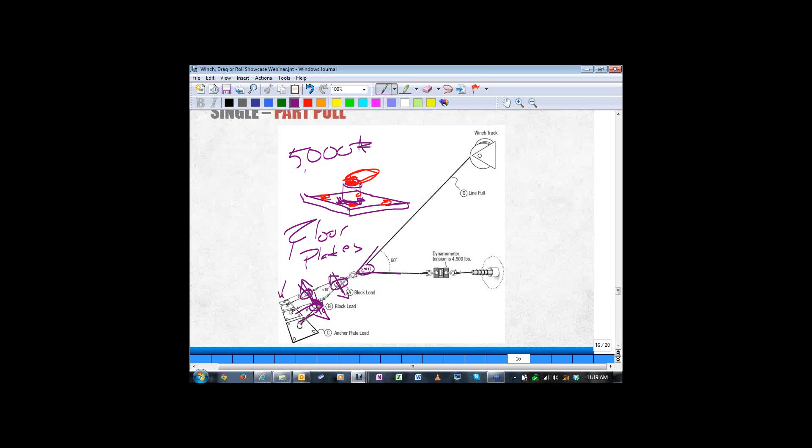It's really like tilt wall construction—you share that load out, distribute it, and bring it down to the lowest possible reasonable value onto the floor. So thanks for staying with me, but that's what this is all about. This is tough, dangerous, tight-confines rigging activity, and we needed good solutions, and this is where we're dialed in with them.

You can see on the page there that the value is 4,500 for the dynamometer showing that load being pulled out, and we want to make sure that's anticipated—that's what it broke free at, and it reduces as you continue to pull it. Once it gets free, we have a way to pull that wire up and out of that hatch cover and free it up and roll it out of there pretty quick.

Here's the question: what is this? We needed to know what's the loading at block A, so we have questions on our page based on the 4,500 pounds, basically line pull. We can already note in here 4,500 pounds for D because that's line pull—that's a given. We know it's a little more for dynamics and friction, turning that sheave and so on. So we put D, 4,500 pounds for line pull going up to the winch. Now, what's the loading at this block, A? What's the loading at the baby block, B? What's the loading at the floor plate, C?

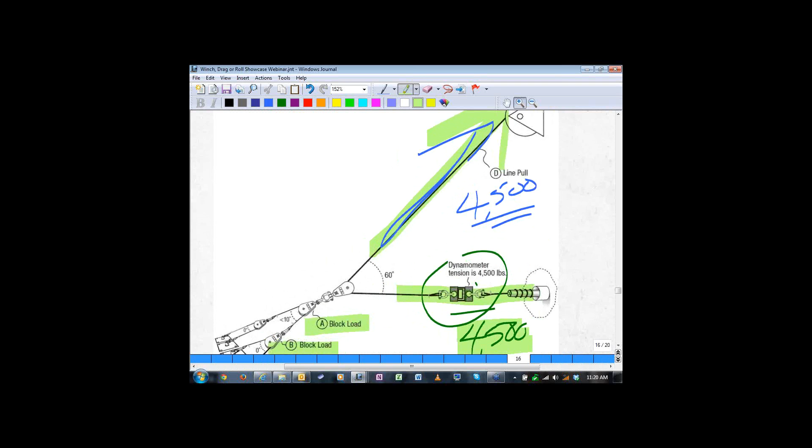Now we've got to start breaking that down and see what we got for paying out and redistributing that load down to those smaller blocks. I'm going to increase the size of our drawing here, bring this into view, get rid of some of these things. All right, having a ball, having a blast.

We know we've got a line pull, so I need to go back to my block factor column on the card. I can see I've got a 60-degree angle right there, and the line's coming straight in here, going around that block and right up to the winch. So I'm going to go back to my master rigger card, panel 1, and find the block loading for 60 degrees. Block loading, block factor at 60 degrees is going to be 1.73.

Awesome, so let's go into our diagram. Remember, block factor times line pull equals block loading. Our block factor is 1.73 times a line pull of 4,500 equals a block load of about 7,785. A lot of you are crunching numbers along with us, and we're just kind of walking and talking together with this. So block loading at A is about 7,785.

So that's at this block right here. We've got a shackle right behind it, another shackle going into that, and another block right there, and that load is transmitted right to that block. So our 7,785 that shows up at the lead block is transmitted in a straight line to that receiving block on the far side, which helps equalize down to those floor plates. So we'll write that in here, 7,785 pounds is block loading at A.

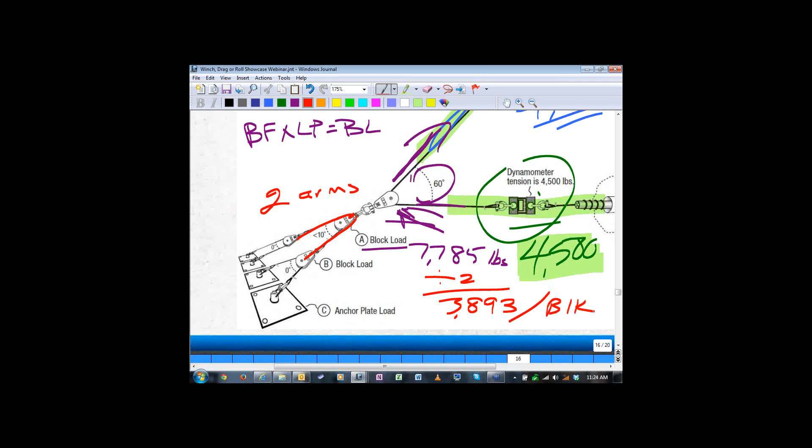So this block on this side is 3893, and its twin brother right over there, 3893. I'm going to use that, put this in, 3893 right there. So we've got 3893, and we're going to break that block's load down one more step.

So keep the numbers on your calculator, let's take 3893 divided by 2, and we're going to get 1946 or 47, depending on your rounding. That's our anchor at the anchor plate, and hoist ring is 1947. I think you got 1946 on your sheet there, but it's just a rounding issue from the first calculations as we step down. So let's solve this.

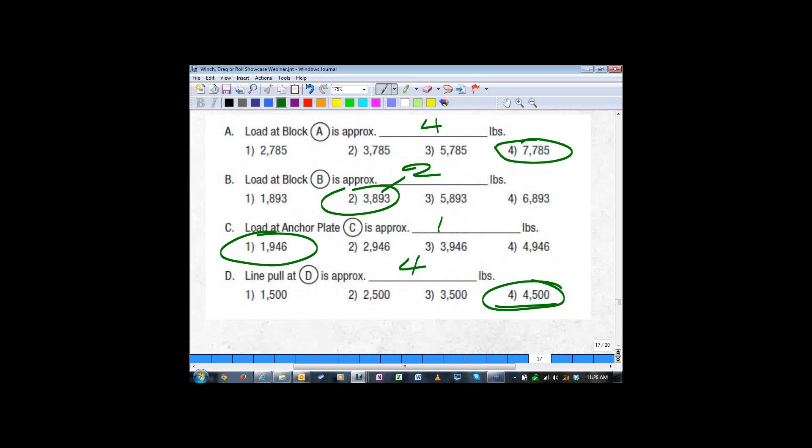Okay, excellent. Now here's the question of the day. Let's go back to that drawing just for a second, and I'll let you know how to work on that last workshop. Let me bounce this out a bit, we'll get rid of a bunch of this stuff.

Here's the question. If we get rid of these anchor plates - because I have the magic pen, I think I can do this - and get rid of this one, and get rid of this one. Let's see, let's get rid of these guys right here for just a second. We're just going to take these to 2 anchor plates. Let's just do this for a second.

All right, so this is the bunny trail. Hang in there with me, we're going to get there. Elmer Fudd will be showing up right there with us.

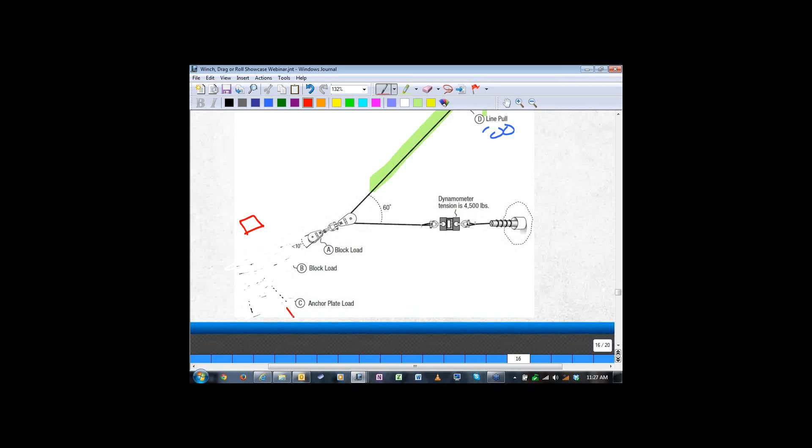So if we were restricted for location of anchor plates to something like this, we might have an oh my goodness moment that could get us in a big world of hurt here. So if we went really flat like this - hoist rings there, slings, etc., hoist rings here, slings, etc.

Now you know what happens here? We're trying to drive, in this case we got rid of everything else. If you remember, that was 7785, and I'm just kind of winging it here for a minute, but what can happen is these now - there's no mechanical advantage in any of these things. We were just able to step that load value down by sharing it to pup blocks and anchor plates.

But the flatter that blue sling gets in its angle to horizon right here, the flatter that gets, what happens to it? Does it increase in tension or decrease in tension? Excellent, it increases in tension. So you want to be really cautious.

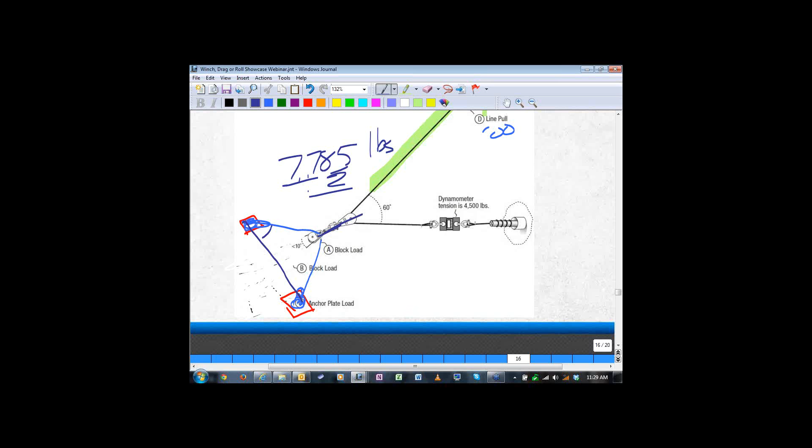If you do a lot of rigging here, we would be anticipating, ideally if we could go down to 2 little plates, we could divide that by 2, and in effect straight away from each one, we're going to have what that number was, 3893. But at a 30-degree angle from the horizontal, what happens? Remember the load factor for 30 degrees?

I can take you right to the master rigger card. Here's the master rigger card front panel 1. Here's 30 degrees, our length to height ratio is 2 to 1. We'll take length of 2 times height of 1 times share of load, and we're going to be right over here - that's 3,800 times at 30 degrees, times 2 divided by 1, and we're clear back up to 7785.

Oh my goodness, there's 7,785 pounds in this sling, in that line going to those anchor plates. And we just blew up our 5,000-pound anchor plates. You see what happened there? So that's how easy and fast this happens, because these are max rated at 5K, and we're now over 70, almost 7,800 pounds, just grabbing 2 of them.

We're only using 2 anchor plates because of location, spread, obstructions, and all kinds of stuff. The guys decided we can only put in 2 anchor plates, and they've got to be far apart. Really bad idea. Really bad.

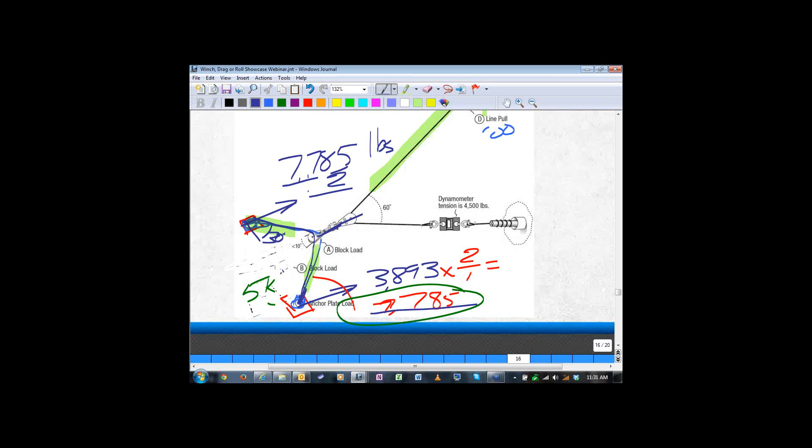So, all right, very good. There is an answer key to this, and Jonah will be back online with us in just a second. There's a 4th and last workshop, fairly involved, nothing we couldn't do or haven't done in part. The answers for all of these are on the link Jonah will provide, and we'll be able to resolve all the elements with this very last workshop.

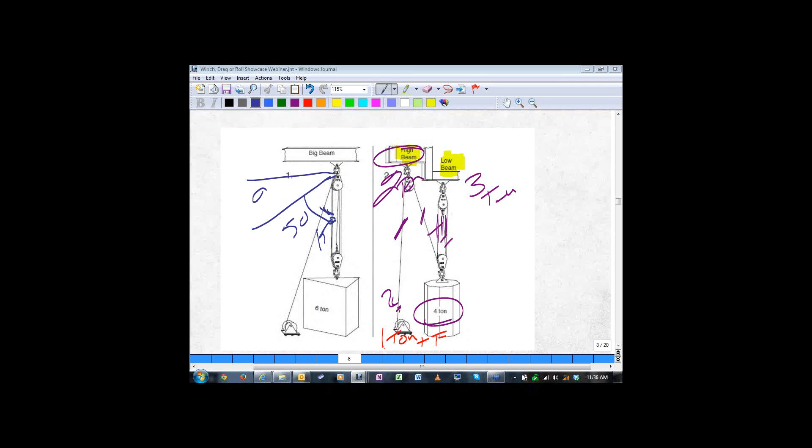Yes, it does. What happens here is that if we could get this lead line, if we can increase this angle, let's just say it's 15 degrees right now. If we could get it out further to 50 or out further to 90, we're constantly lowering the down force or load to the big beam. As we've already discovered, as we go straight down, it'll interact with that block and be a direct down force.

But if we can get it further and further, if we went over to a column to another block and then down to a butt block and over, we'd definitely be reducing that one part of line pull and its force and effect on the big beam. So anytime you can open that up to a wider angle, it will lower the force on the big beam. Great question, great question, okay.